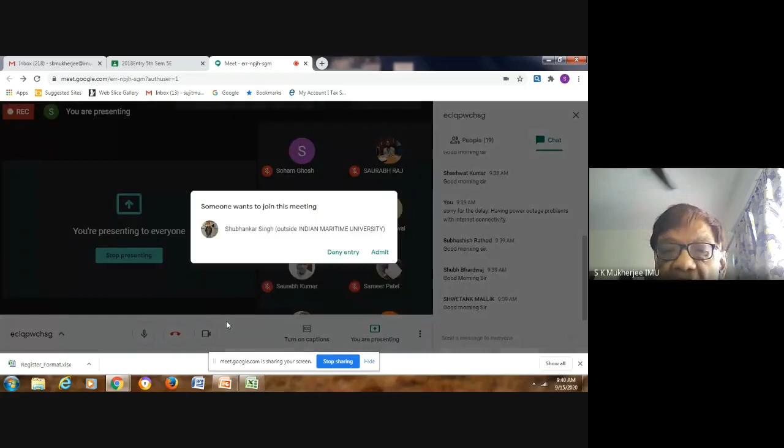There's Saurav Ranjan coming in. This time I think in the last class I had gone and put in too much information, and that information overload is probably going to...

Make it difficult for you to actually absorb the subject matter. So today's class, we will go into the subject, but with the objective of you actually absorbing the subject matter. I shouldn't simply be pouring out information without figuring out how you're going to absorb the subject. It is very important that you absorb the subject while it is being told, not while you're revising. Absorb it while you're being told in class, and keep a pencil and paper with you.

There are some small bits or nuggets of information I'll put across to you which are not there in the PowerPoint. Have those bits of information written down in a notebook, pad, paper or diary, because not all the information will be in the PowerPoint program. A lot of information that comes to my mind I will share with you, and that will enhance your knowledge and help you whenever you're asked oddball questions.

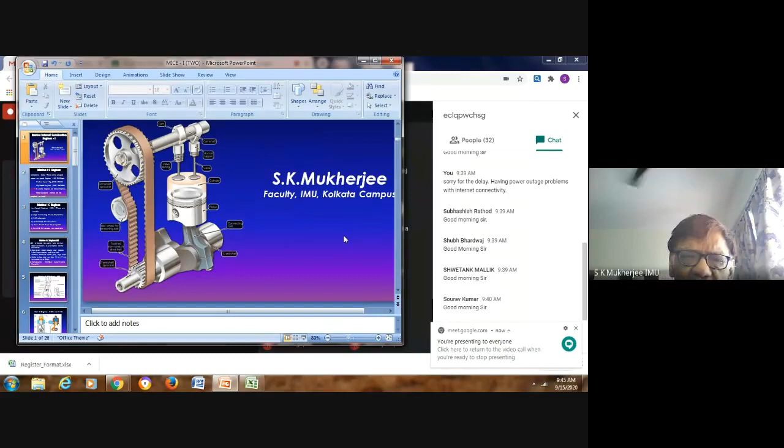Somebody's come. Come in. What sing is he? Shubhankar Singh. Okay, Shubhankar.

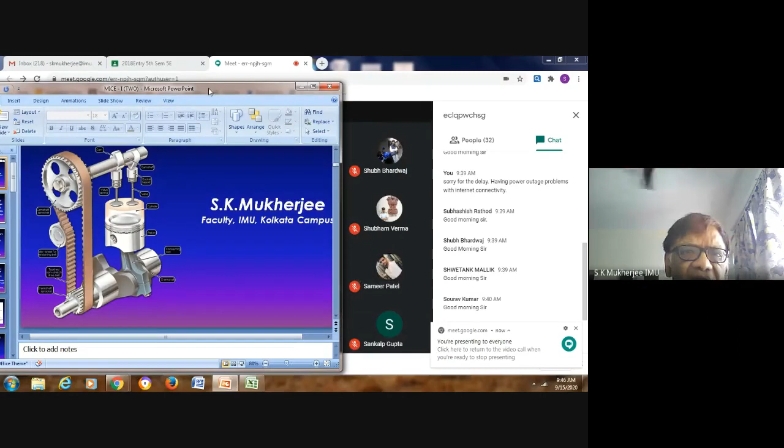Now let's start. In the last class, we had described two-stroke and four-stroke engine timing and the pressure and volume diagrams. A little revision on the four-stroke and two-stroke engines. We are going to continue now in detail, describing all the parts.

Now you see this first picture. It is a picture of an engine, not a marine engine, but a four-stroke engine. How do you decide it's a four-stroke engine from here? In the four-stroke engine there are four strokes, and in the two-stroke there are two strokes. In the two-stroke, two strokes make one complete revolution of the crank.

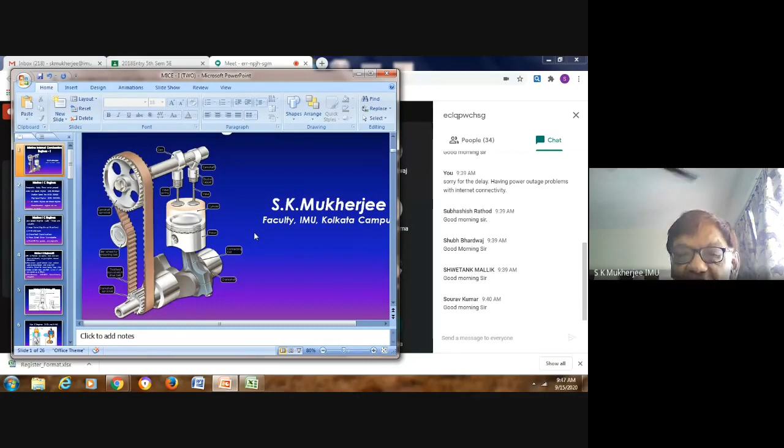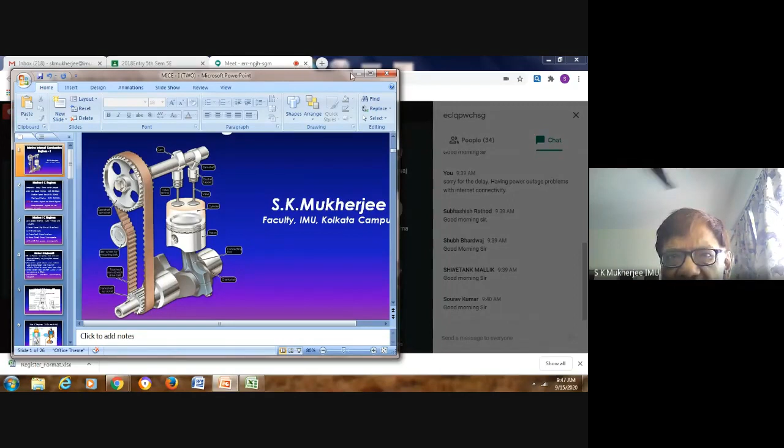In the four-stroke, the piston goes up and down, up and down. So that up-down stroke... every time it goes up and down, one revolution of the crankshaft has to take place.

So this is the crankshaft at the bottom of the diagram. It makes one revolution, and two strokes are completed. But in the four-stroke engine, you need four strokes to complete the cycle, so the crankshaft has to revolve twice. So every two times it revolves, the camshaft has to revolve once.

Why? Because the suction valve has to open only once in the cycle. Likewise, the exhaust valve also has to open once during the entire cycle. So during the entire cycle, the crankshaft rotates twice and the camshaft rotates once. One revolution of the camshaft means two revolutions of the crankshaft, because the piston has to go up and down four times, whereas the valve has to open only once during the whole cycle. That is why the camshaft speed is half the crankshaft speed in four-stroke engines.

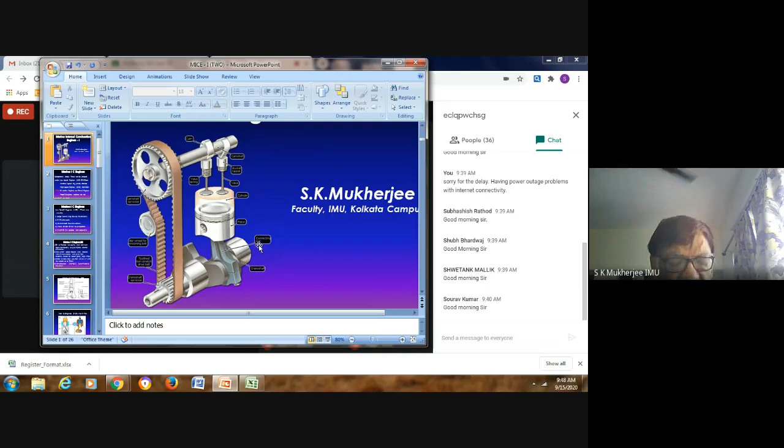All right, that's very clear. If you have any questions, do not hesitate to type out on the chat. Now who's come?

Sarsaki Bhadra. Sarsaki, you've come pretty late. Anyway...

So remember, the crankshaft speed is twice the speed of the camshaft. Over here we have a camshaft which is driven by a belt. This belt is not a metal belt, it is a V-belt medium, made of rubber with fiberglass reinforcement within the strips. And it has got teeth.

These are automobile belts used for automobile engines. Normally the camshaft in an ordinary engine is driven by gears - there will be idle gears here, and then it'll have a camshaft. Over here we have an overhead camshaft, OHC.

Overhead valves are operated - these are the two valves, one is the inlet valve, one is the outlet or exhaust valve. You see the cam over here - the cam peak is over here, and in this case the cam peak is down below. When the cam peak is down below, it means the valve is being pressed down to open. You can see the spring over here that has been compressed, whereas over here the spring has expanded because the cam peak is on top.

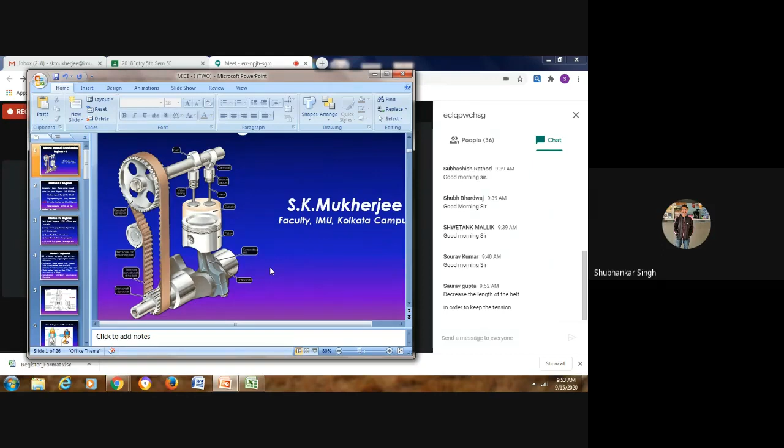I'm not saying to variably increase or decrease the belt, sir, from the initial stage. Okay, I get your point. The idea is to keep the position of the belt fixed. You cannot decrease or increase the length of the belt, but you keep pressure on the belt so that there is no loose motion or coming off of the belt.

And this wheel is kept under pressure by means of a spring. That spring tension will help to maintain a certain pressure, or spring compression, more than tension. This spring compression on the wheel will keep the belt tight so that there is no slippage, no looseness of the belt.

That's all. In marine engines, you will have a chain drive, and that chain drive will be identical to this. The chain by itself will be a loose chain, and it is loose so that it is easily slipped onto the sprocket wheels. After it is fitted on, there has to be some tension on the chain.

So that tension is also maintained by a similar wheel that you see here, and it will have a spring compressing on this idler wheel to keep that chain under a certain level of tightness. That tightness cannot be too much, it cannot be too little. And that chain, instead of driving gears like this, drives sprocket wheels.

I hope you understand what a sprocket wheel is. It is similar to what you see on bicycles - those wheels which have got teeth on them are called sprocket wheels, and the chain slips over them so there is no slippage. So that is what our marine engines use - either chain drive or gear wheels.

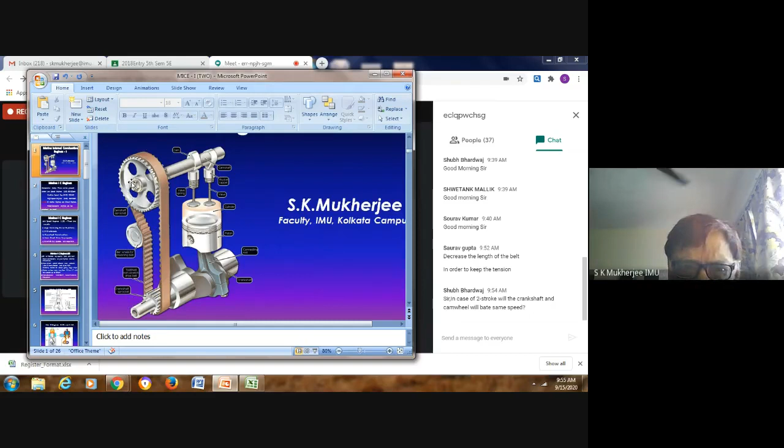There will be a number of gears. Actually, this particular camshaft is above the engine. Normally it is beside the engine, and there is one gear idler wheel which makes the camshaft run on the basis of the flywheel. Anyway, that is enough for this particular unit.

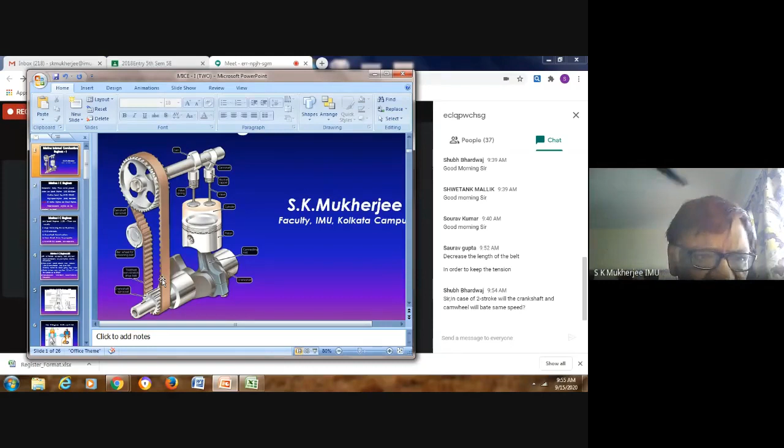Let's move on, let us study two-stroke engines in detail. Oops, too big. Okay.

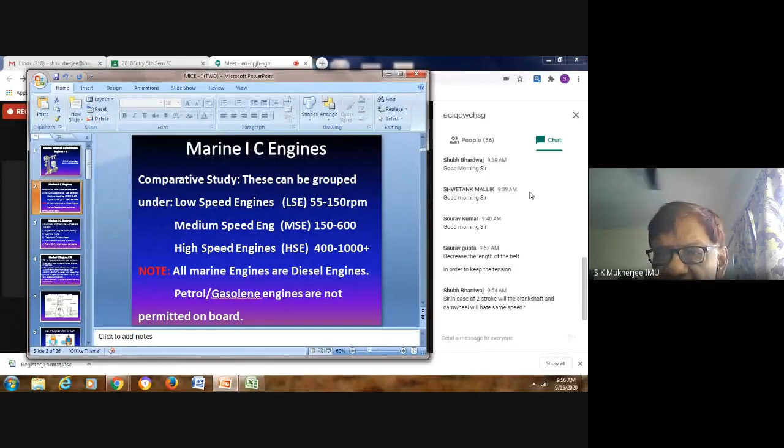I hope everybody has come - 36. And how many students are there in the class section here? 38, that means two boys are not present. Sir, they have their arrear paper today, sir. Oh okay, okay, so there will be no more disturbance. Let's make this the biggest screen I can make.

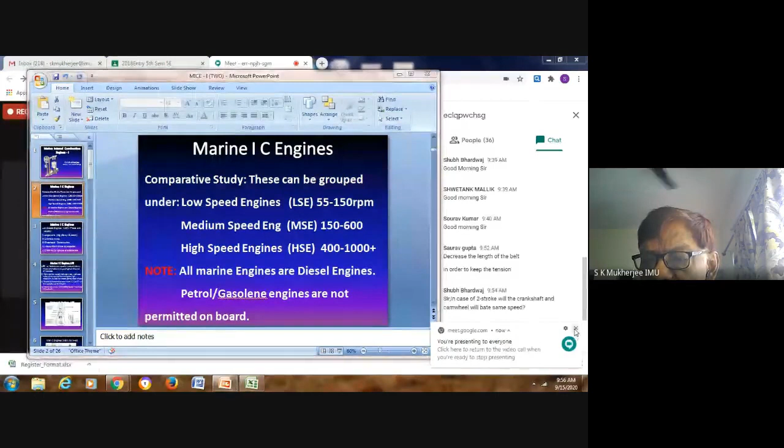Okay, now if you have any questions... a minute, somebody has asked, Bhardwaj has asked a question: Sir, in case of two-stroke, will the crankshaft and cam wheel speed be the same?

Good thinking, Bhardwaj. The camshaft and the crankshaft in the two-stroke engine will have the same speed because the piston moves one revolution for both the strokes, that means the upstroke and downstroke. It moves one revolution, and the camshaft will also operate only one time because it needs to operate the fuel pump only once during that one revolution. Correct? Good thinking, Bhardwaj. Two-stroke engines, camshaft speed and crankshaft speed is the same.

Four-stroke engine, crankshaft speed is twice the camshaft speed. Do not forget, especially at your basics, these are the questions you will ask: what is the relative speed of the crankshaft to the camshaft in the two-stroke engine? Is it the same in the four-stroke engine? If not, why? So be careful. Don't simply learn that it is twice the speed or same as the speed. You must be able to tell why it is the same speed and why in the four-stroke it is twice the speed of the camshaft. The question why has also to be answered, not just giving, yes sir, it is twice and this is same. That should not be enough.

All right, so let's go into comparative study of marine IC engines. Good, Bhardwaj, that you asked and got your concept cleared. Any other questions? Do not hesitate to write down, don't go away by keeping quiet.

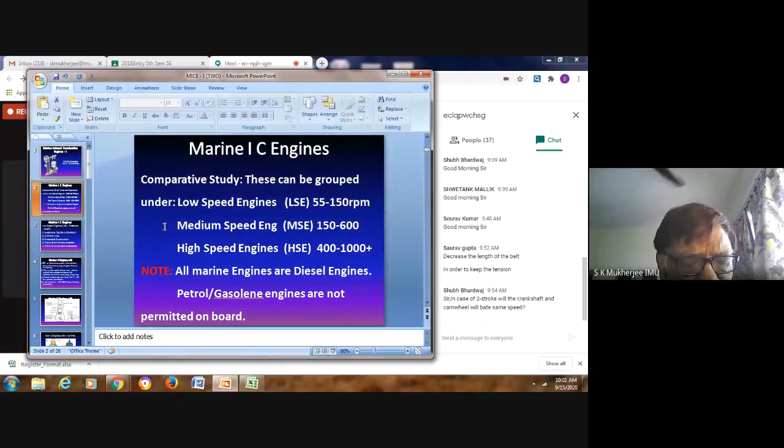Remember, do not make a mistake by ever saying that the lifeboat engine is a petrol engine, or that the emergency generator is a petrol or gasoline engine. You will fail in whatever exam you're appearing for, so do not make that mistake. Petrol is not permitted on board because it is a huge fire hazard.

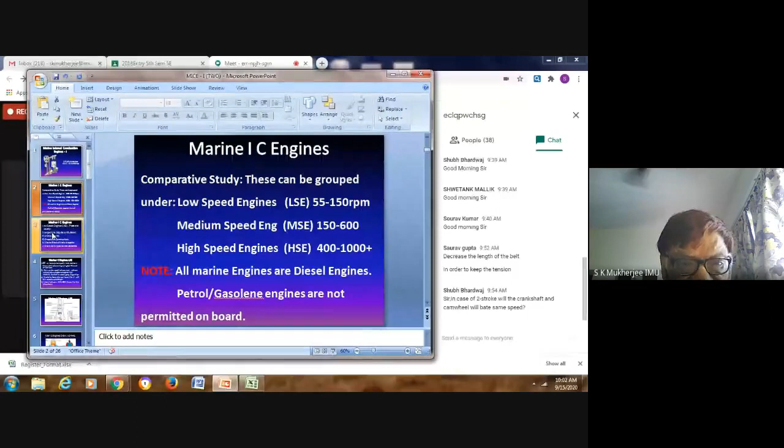Next, let's go on to low speed engines. These are usually large bore, meaning the diameter of the cylinder is large. They are anything above 80 centimeters, that's 800 millimeters, and the piston will also be proportionally large.

These low-speed engines are generally of the two-stroke cycle. I have not known any four-stroke engine being a slow-speed engine. There are no slow-speed engines amongst the four-stroke engines. So low-speed engines are of the two-stroke cycle.

Next one is the crosshead construction. Now this needs a little bit of clarification. What is a crosshead? It will take some time to explain, so pay full attention. I will show you some diagrams also which will help in understanding the crosshead construction of a diesel engine.

We have seen that the piston is attached to the connecting rod by means of a gudgeon pin or a wrist pin, so it moves angularly as the piston moves up and down. Now suppose you have a long stroke engine, a stroke that is very long. That means the diameter of the crank will also become large, because the bottom of that circle to the top of the circle is the stroke of the engine, the distance the piston moves in the cylinder liner.

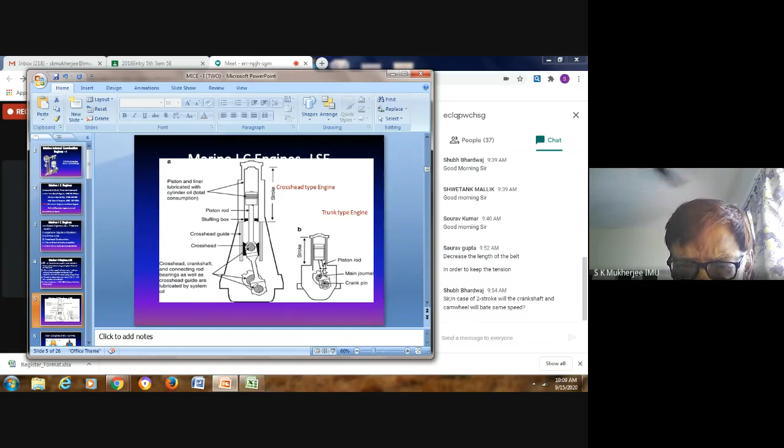Okay, so what is the crosshead? It is a means to connect the piston rod and the connecting rod, the crosshead. And this is required in long stroke engines. Why is it required? Because the long stroke will create a large angularity of the connecting rod, and this angularity will interfere with the bottom portion of the cylinder liner and may cause it to break or make contact, which is not feasible or permissible. So to avoid this, we are required to have a crosshead.

Remember, a two-stroke engine need not necessarily have a crosshead, but most students are brainwashed into believing a crosshead engine must be a two-stroke engine. No, that is not the way it is. A crosshead engine is an engine with a long stroke. A two-stroke engine may not have a crosshead. If the stroke is short, why have a crosshead? Doesn't make sense. It is additional equipment, additional attachment, additional maintenance, additional lubrication.

All are additional work. But two-stroke engines are still preferred in spite of this difficulty of a crosshead because they can burn very poor quality fuel. And fuel cost for a ship owner is 60% of the cost of running the ship. So it makes sense to burn poor quality fuel. And to burn poor quality fuel, you need more time for the fuel to burn. That is why slow speed engines with a long stroke allow for the fuel to burn continuously and completely by the end of the stroke.

All right, let's get back. So that is what is crosshead construction. We will go in detail regarding the crosshead at a later date. I will go to all the parts and describe them in detail. Right now, we are describing low speed engines in general. Okay, so they have a large bore, they run on two-stroke cycles, they have crosshead construction. Usually, because they are low speed engines, they will have a crosshead.

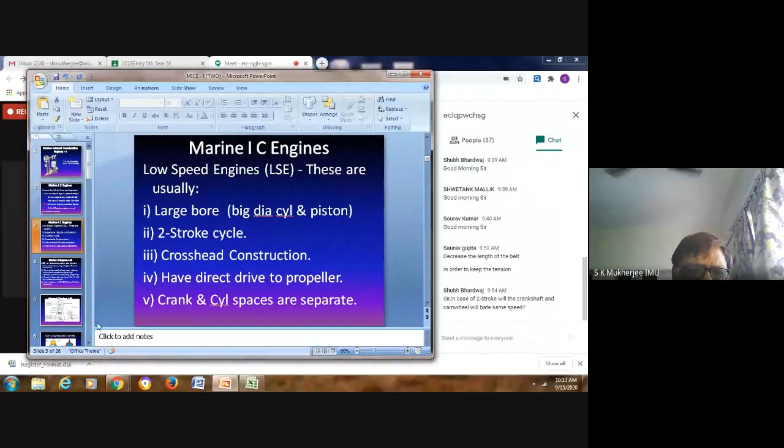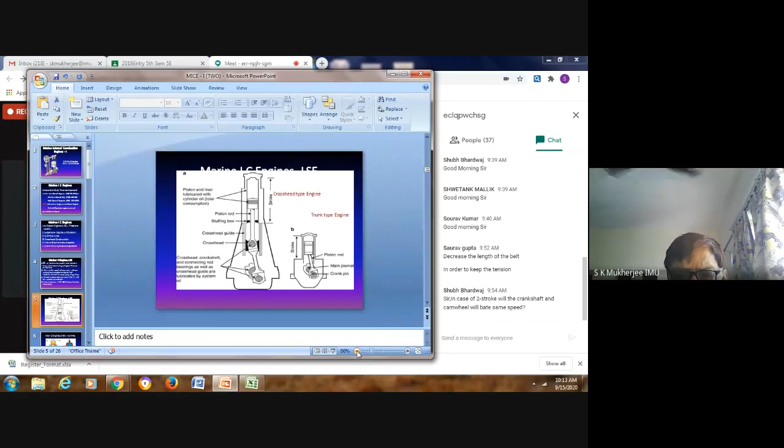Here is your two-stroke engine. The plate is here, and this is the piston rod. Let me make it a little bigger.

Because if you have a chat question, then I won't be able to see it - I want to check if there's any question.

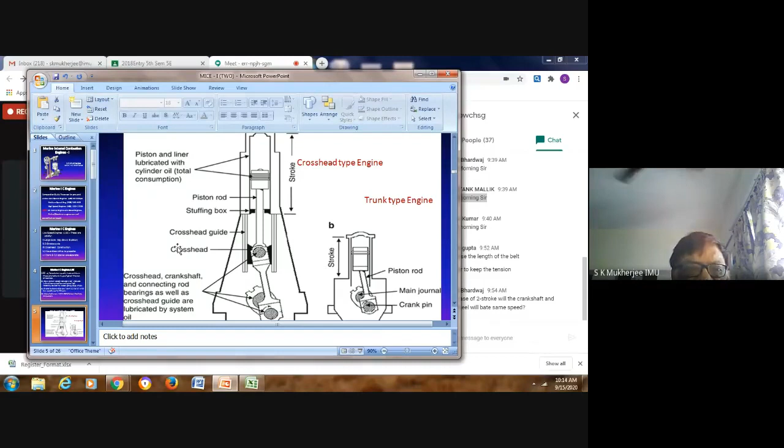Now let's have a look at the diagram. I hope the diagram is quite clear now.

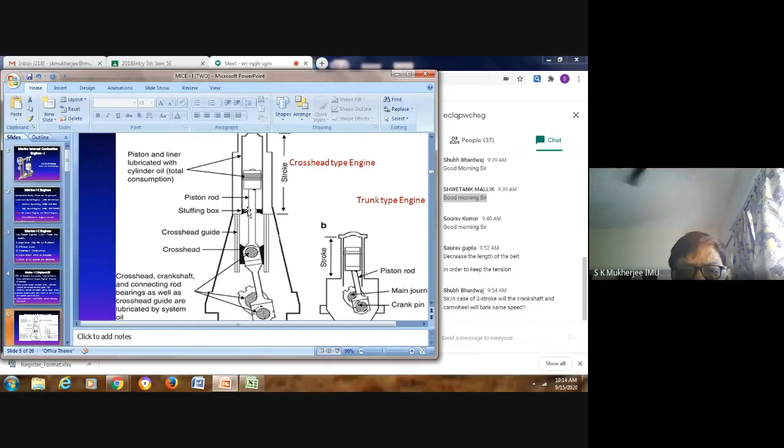Now, this is the horizontal plate I was talking about, and on this plate you have a hole through which the piston rod passes. But you need to provide a sealing arrangement on that piston rod, because this under piston space that you see is used as an air pump - it is called under piston scavenge spaces.

Air coming to the engine arrives in stages. The first stage is the turbocharger, which draws air from the atmosphere, compresses it, and sends it into the air pipe. From there, air is fed to individual units of the engine. In some engines there are two stages. Air comes into the air manifold at a temperature of about 130 degrees centigrade, because compressing air raises its temperature, so this air has to be cooled. After cooling, it's passed on to a certain section of the air manifold.

From here, there are non-return valves that allow air to flow in only one direction, into the under piston spaces. Once it enters that space, when the piston comes down it acts like a pump, compressing the air under the piston. That pressurized air then goes through another set of non-return valves into another chamber of the air manifold, and from there directly to the inlet ports. So there are two stages of compression.

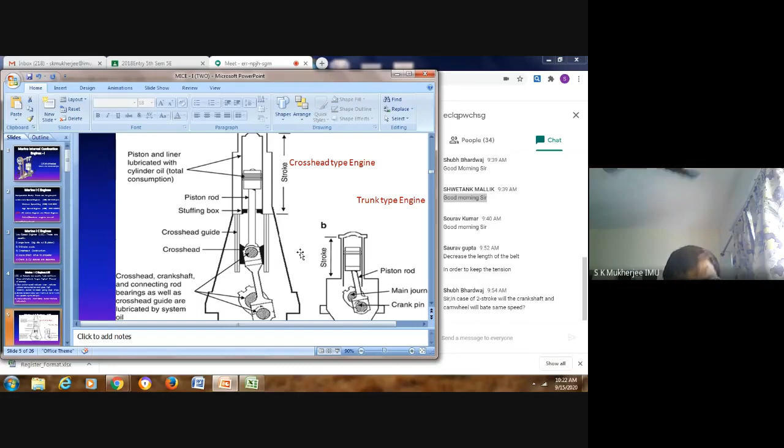What I needed you to understand is this concept, where the crankcase space and the under piston spaces are separated by means of a diaphragm. I have a better diagram and I'm going to show that to you. Keep your cell phones ready and take a snapshot immediately, then from that snapshot, hand draw and practice that diagram. That is the diagram you will be required to draw in an exam - not this one, nor the fancy pictures I've shown you. I will give you a diagram which you can actually draw easily, and that diagram has the names of all the parts, which will help you improve on naming parts of the engine. Okay, let's get back to our subject.

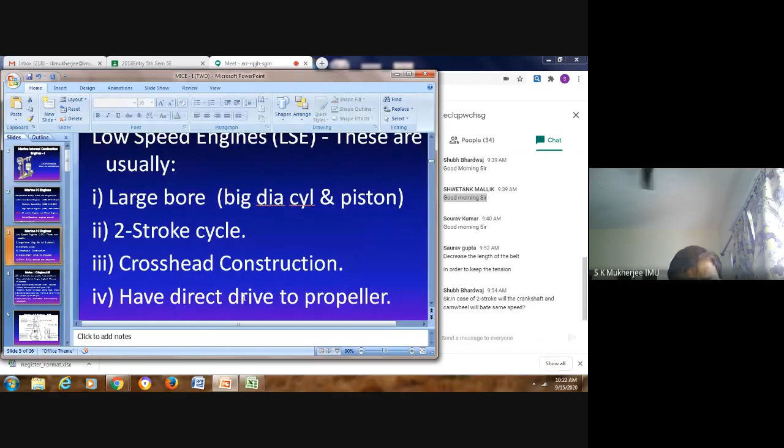Yeah, sorry, we were on this one - have direct drive to propeller. There's one more, I think - crankcase and cylinder spaces are separate. I hope now you understand that crankcase and cylinder under piston spaces are not the same. This is the cylinder, so these spaces are separate from the crankcase spaces by means of a diaphragm, and within the diaphragm you have a sealing arrangement called a stuffing box. It is also called piston rod gland.

So don't forget, you can write these small notes - stuffing box is not the only name for it, it can be called piston rod gland, and it consists of several rings. It's quite a complicated setup, and it helps in sealing the under piston spaces and the crankcase spaces, and any oil that is scraped on the piston rod is drained out. There's a drain for the oil which allows the under piston spaces oil to be drained out of the engine, because cylinder oil, once used, cannot be reused. But crankcase oil is continuously being reused. You have a separate arrangement to continuously clean this oil, called a centrifugal purifier, but that will come later.

Remember, this system oil in the engine is similar to your blood system. Absolutely similar to your blood system. Any problem with the engine, you can identify by taking a sample of the lube oil, sending it to the laboratory, and understanding.

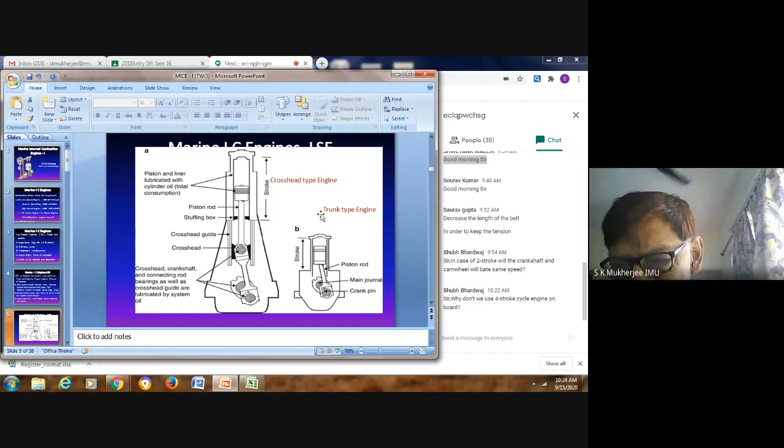Bhardwaj, of course we use 4-stroke cycle engine on board. Not all engines on board are 2-stroke cycle. The auxiliary engines, where fuel cost is not the biggest problem, they are all four-stroke engines. The emergency generator is also a four-stroke engine. The lifeboat engine is also a four-stroke engine. And in some cases you have an emergency compressor, which is run by an engine, and that engine is also four-stroke cycle.

Don't believe otherwise, because when I describe two-stroke, it is the main propulsion engine only, for running the propeller. Two-stroke engine is not used for any other purpose. So the main engine, very common for most ship owners, is a two-stroke engine because it can burn very low quality fuel. Four-stroke engines generally could not earlier. Now they have been modified and they can burn it, but they have certain restrictions, and because of those restrictions they are put aside, so owners still prefer two-stroke engines. That's not to say four-stroke engines aren't used for propulsion - they are, but you will need possibly two engines or a V engine to give that additional power.

All right, so where was I? So you now understand crank and cylinder spaces are separate. Okay.

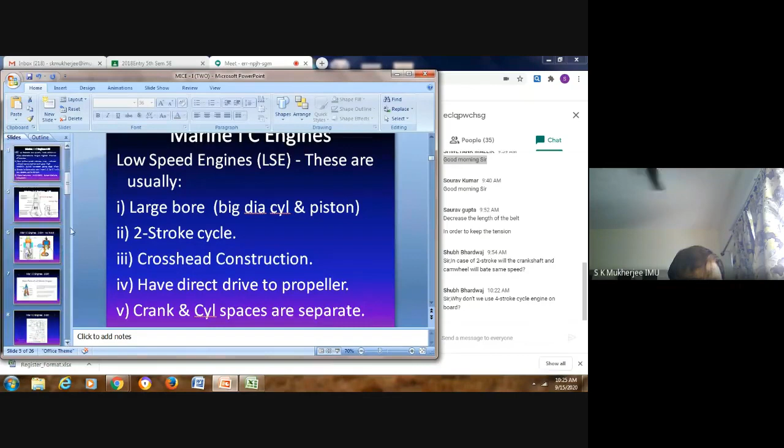This is where your crank and cylinder spaces are separate, but in the non-crosshead type, these are called trunk type of engine. Why is it called trunk type of engine? So where is the excess oil scraped off the cylinder used?

I told you just now, any oil that is scraped off from the cylinder liner and falls on the diaphragm has to be rejected. There are drain pipes from there leading out of the engine and they go into a sludge tank. That oil is gummy, sticky, full of carbon, and okay, it has been neutralized, no doubt, but that oil cannot be used again. It is a one-time use. Cylinder oil is a very costly oil and it is a one-time use oil. You cannot reuse that oil.

But the crankcase oil, what is inside here, is used continuously and almost never changed. Even if it gets dirty, it is passed through a purifier for continuous cleaning and put back in the crankcase. It is similar to your kidneys. This is your blood system, what you see inside the engine, the oil that is used, and it has kidneys - those kidneys are called centrifugal purifiers. They purify the oil and put it back in the engine, much like your kidneys.

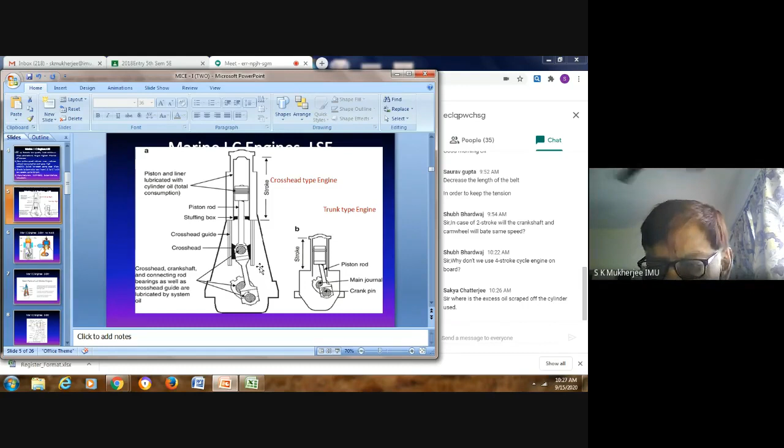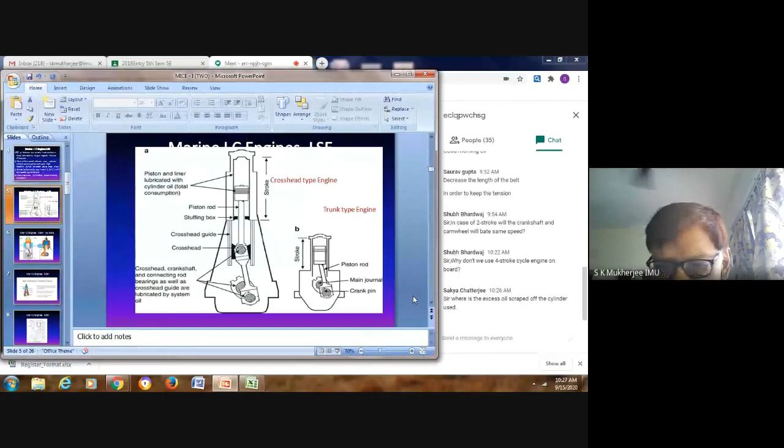But that we'll go to later, we are going off the topic at the moment, and Chatterjee, you're leading me off topic. But anyway, do ask questions. The excess oil scraped off the cylinder is not used again, ever. It has to be rejected. It is like sludge, okay.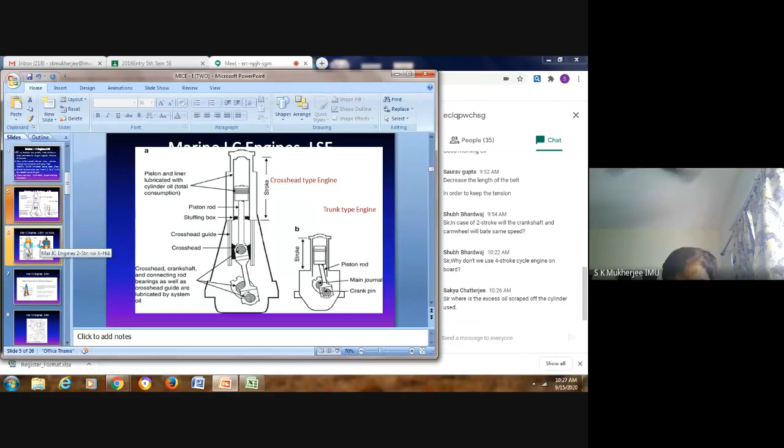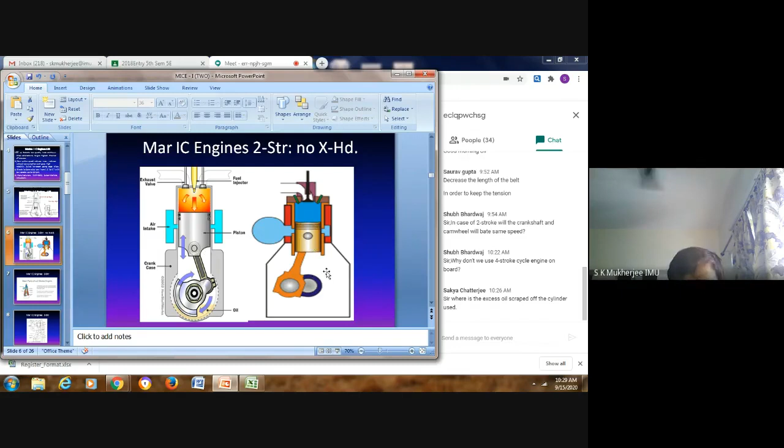These two diagrams are indicative of two-stroke engines without the crosshead. These are the main parts of a two-stroke engine. You can read this; I think the diagram is quite clear.

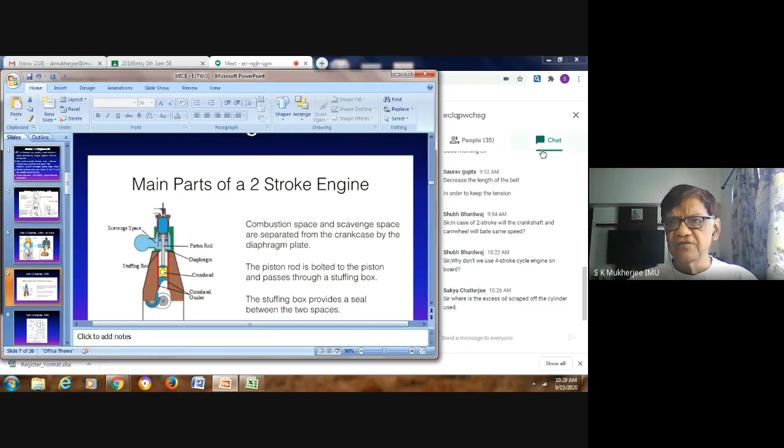Okay, I hope you can see me. I'm also, yeah, you can see me. So that is your diagram.

Any more questions? Good, you asked this question because a lot of boys don't know about this cylinder oil being thrown out once it is used. They think it can be used again, purified and put back. No, it cannot be used. It is rejected.

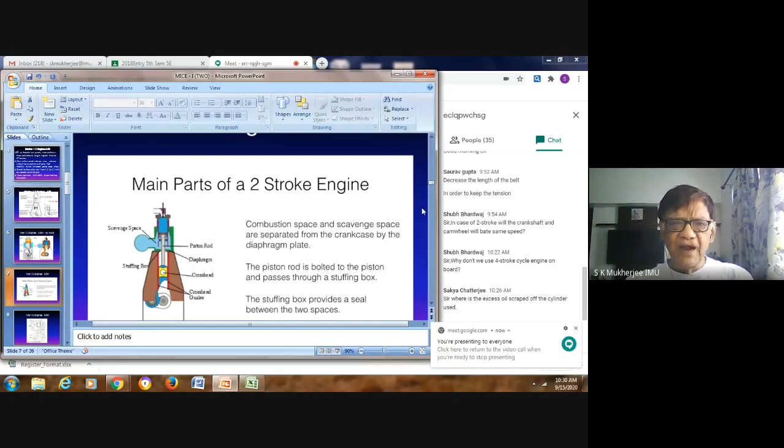Now, main parts of a two-stroke engine. The combustion space and scavenge space are separated from the crankcase by the diaphragm plate. This is the diaphragm plate, the same diagram I showed you earlier where the stuffing box is.

That stuffing box is a sealing arrangement on the piston rod. Remember, the piston rod surface is mirror finish. It's very smooth and shining like chromium. It is polished and polished and polished.

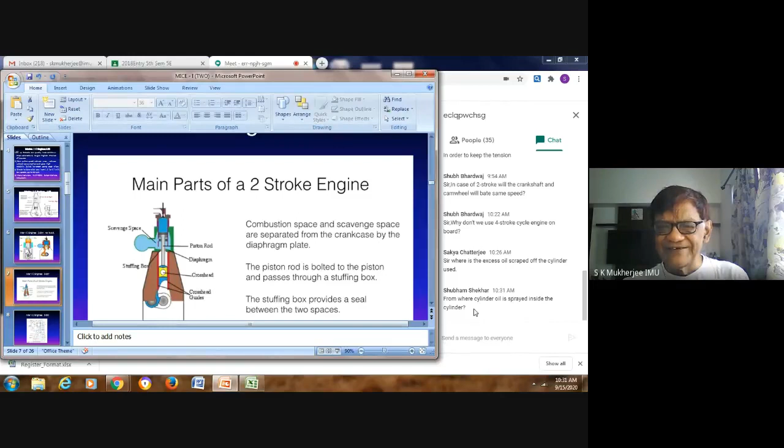Where is it scraped? It is scraped into the sludge tank. There is a separate tank where the sludge oil goes, from where cylinder oil is sprayed inside the cylinder. You're going into depth. Let's go back - from where it is delivered into the cylinder liner.

Let's make it a little interesting. Of course, now two-stroke motorbikes are no longer in fashion - all motorcycle bikes are four-stroke. But I remember when two-stroke motorcycles were common, though you boys won't remember since you haven't ridden them. The principle of lubrication is the same.

These two-stroke motorcycles had a fuel tank, and in this fuel tank we used to add a little mobile, that is the lube oil, and then fill the petrol. So the petrol and that lubricating oil used to mix. So the petrol in the two-stroke motorbike was a mixture of lubricating oil and petrol. In the four-stroke bike, you only fill petrol - you don't fill lube oil in the petrol tank. You have lube oil in the crankcase of the four-stroke engine. In the two-stroke engine, you do have crankcase oil, but you also have the fuel tank filled with lube oil.

Now this is a major issue, pay 100% attention. When you're riding the two-stroke motorcycle, the piston needs lubrication, and that lubrication comes from within the petrol because lube oil was mixed with it. Since the piston is working inside, it gets its lubricating oil because the petrol burns out, but the lube oil does not burn out. The lube oil partially burns out and partially remains on the surface walls. This provides for the lubrication of the piston and the ring for the two-stroke motorcycle engine.

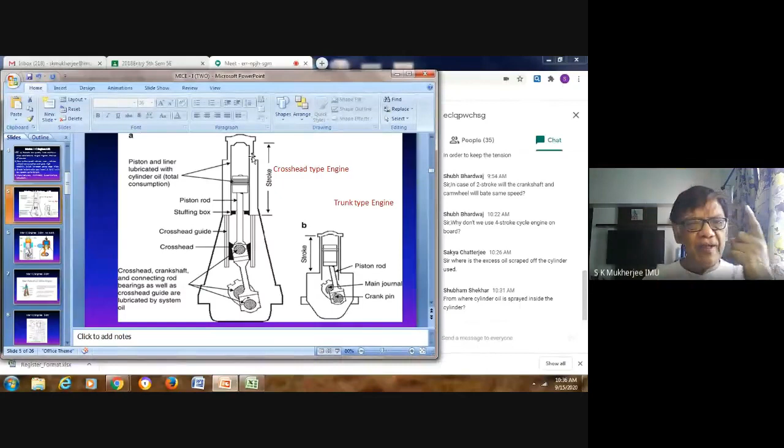Now, this lubricator is run by a mechanical linkage, and the central crankshaft of that lubricator is about 10 inches by 4 inches by 6 inches. Small lubricators, there may be 2 or 3 of them. Each lubricator will deliver oil to maybe 1 or 2 units, with multiple pipes coming out, the diameter of a pencil. These pipes go onto the cylinder liner, say there are 6 pipes, 60 degrees from each other, each having entry into the combustion chamber.

When the engine runs, the mechanical linkages run the lubricator, which is filled with oil. This lubricator is actually a miniature pump, multiple miniature pumps, so there'll be 6 pumps in each, and each of these delivers oil to the cylinder liner. So each time the piston goes up and down, oil is delivered directly into the cylinder liner for lubrication. Usually a little excess is given because nobody wants under lubrication, preferably slight over lubrication for safety.

But remember, over lubrication is as bad as under lubrication. Too much oil is as bad as too little oil. So chief engineers, to stay safe, make marginally more. So that oil ultimately finds its way falling along the cylinder liner walls and onto this diaphragm, and as it comes onto this diaphragm, it starts filling up this place.

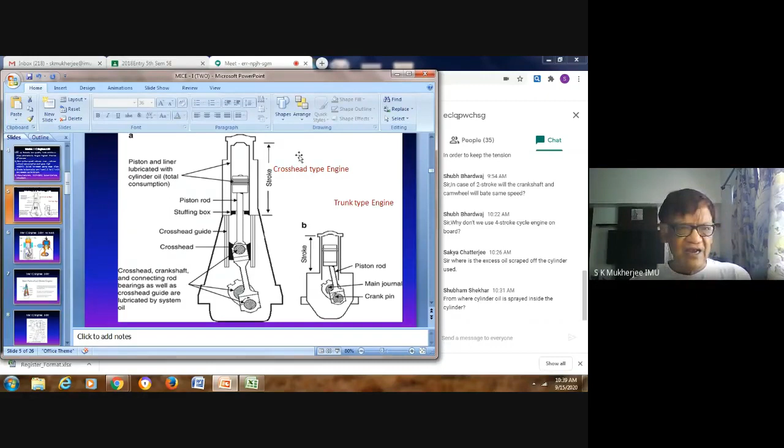Up to that, we will say enough for now. From where is the oil sprayed inside the cylinder? So you have separate oil pipes which are fed into the liner for delivery of cylinder oil. All right, Shubham Shekhar, that is our question addressed. Any more questions? Put it up on the chat.

So combustion space and scavenge space: scavenge space is what you see in blue, and combustion space is up over here. They are not separated. What he has said here is not right, combustion space is not separated. It should have been crankcase spaces, he has made a mistake.

I've copied this full thing. Now I don't know how to change this. He should have said under piston space and scavenge space. It should have been: under piston space and scavenge space are separated from the crankcase by the diaphragm plate. It doesn't make sense.

What he has said here, just remember, under piston space and scavenge space are separated by a diaphragm. The combustion space is the combustion space, it is integral, it does not have anything separate from it. It is integral and there is no separation from anywhere. What is separated is the scavenge space and the crankcase space. The combustion space is inside the cylinder liner, it cannot be separated by anything. It is an enclosed space formed by the cylinder liner, the piston, and the cylinder head on top, so that cannot be separated.

This statement over here needs a little correction. This has been copied from the internet, so I should try... I don't know how to remove it.

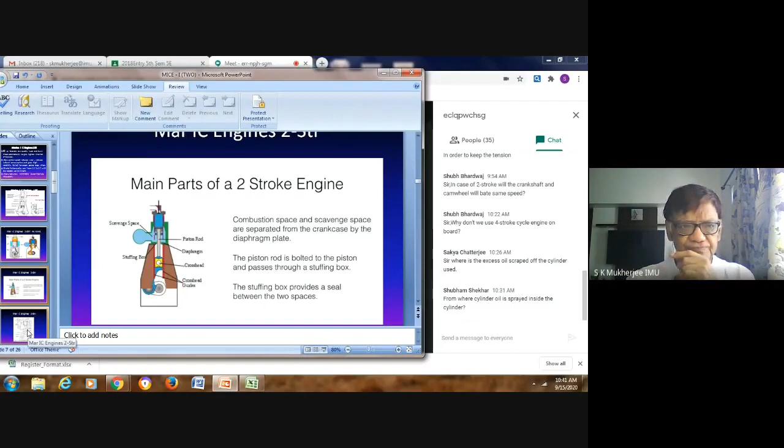Now get your cell phone ready and take a snapshot of the next picture that I'm going to show you. This is the diagram I wanted to show you, and you need to take a snapshot with your mobile.

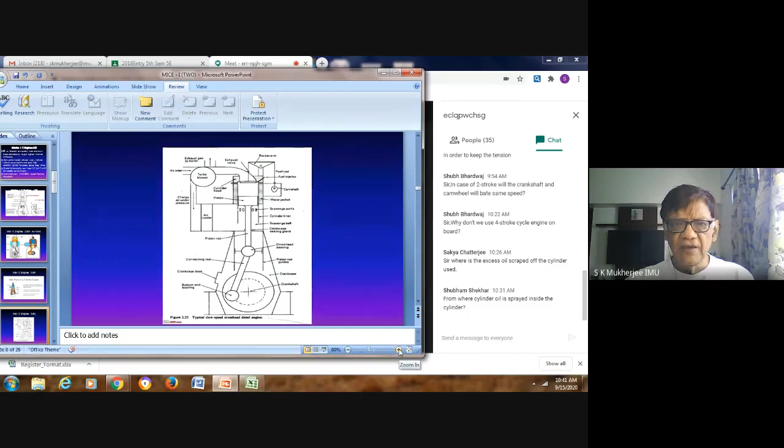Now this is a line diagram which you can actually draw. This is not a diagram which is difficult to draw, but you need to practice and you need to know the names of the parts. All the names of the parts are given over here, and it's quite simple to understand. Now let me try and explain this to you.

The air is coming in from here. It comes into what is called a turbo blower, which is part of a turbocharger. The turbocharger consists of a shaft and two fans. Consider them as fans, one fan this side, another fan this side. Now, when you blow air on one fan, obviously it is going to rotate.

Exhaust gases are led onto one fan and it rotates that fan. Because the fan rotates, the shaft will also rotate. The entire assembly of the two fans and one shaft is called a rotor, R-O-T-O-R. This rotor will rotate if exhaust gases are forced onto the fan blades, and since the fan rotates, the whole rotor will rotate.

On the other side, the other fan and casing are made in such a way, the blade angles are made in such a way, that it will draw air from the atmosphere and pump that air into the air manifold. So the exhaust gases coming out from this exhaust trunking will rotate the rotor, and the turbo blower side will blow air and pump that air into the air manifold or scavenge manifold.

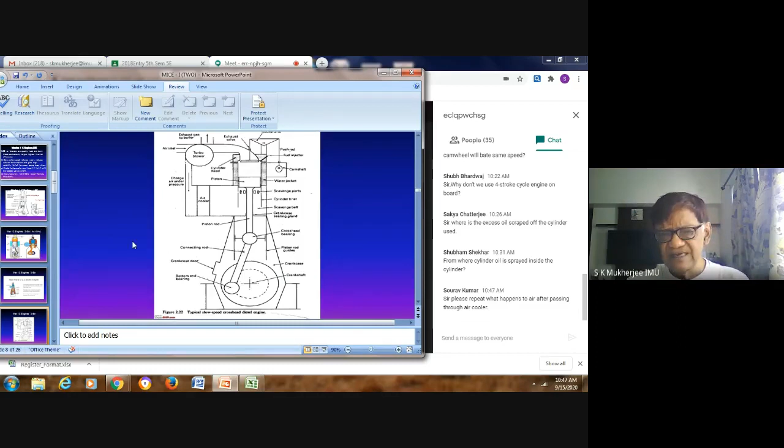Any questions in understanding this diagram or any part of the lesson that I have already explained to you? Do not hesitate to ask questions. Okay, let's move on.

Excuse me, sir. What is it? Sir, what happens to the air after it passes through the air cooler, sir? Please repeat it again, sir.

Oh, okay. Over here, he has shown a very simple diagram. He has shown that after it passes through the air cooler, it goes into this scavenging manifold over here. So when the piston comes down, it goes through the ports and charges the cylinder.

But in the more modern engines, the underside of the piston is used as a pump. So the air that comes in here first actually goes under the piston, and it comes into the underside of the piston by means of some non-return valves. They are not shown over here. Those non-return valves allow the air to pass only to the underside of the piston.

And then there is another set of valves above those non-return valves which allow the air to come on this side, and they are separate chambers over here. These separate chambers allow for differential pressure. So once the air is compressed by the piston when it's moving down, it compresses the air and sends it to another part of the manifold, where it can go directly into the ports and fill up the cylinder.

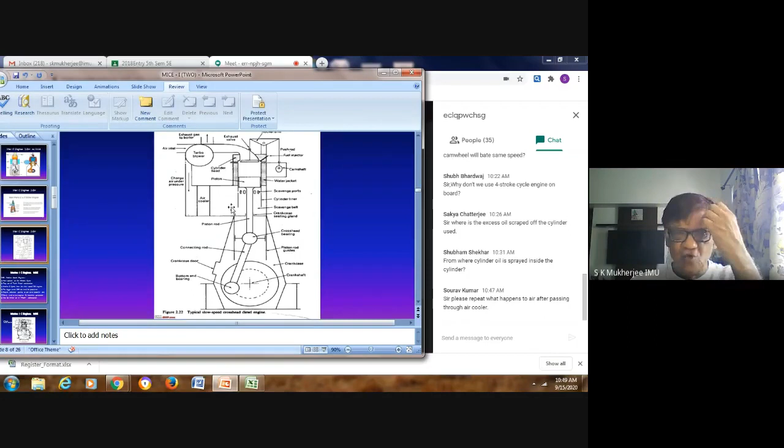So there are actually two stages of compression over here, but right now, for the sake of simplicity, they have shown only one stage. In the more modern engines, there are two stages. But for your fifth semester, keep it to a single stage. Be aware that there is a second stage, and the under piston spaces is used as a pump, so you get better efficiency of the engine. You don't waste anything. So that is what the air is doing.

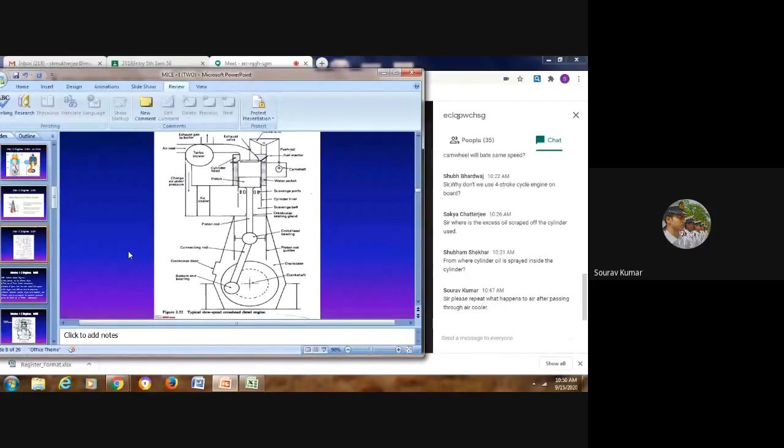It goes into the cylinder as fresh charge air. Is that clear? Have you understood? Yes, sir. Okay. If you have any more questions, I will explain more. But for your fifth semester, this single stage charging is adequate.

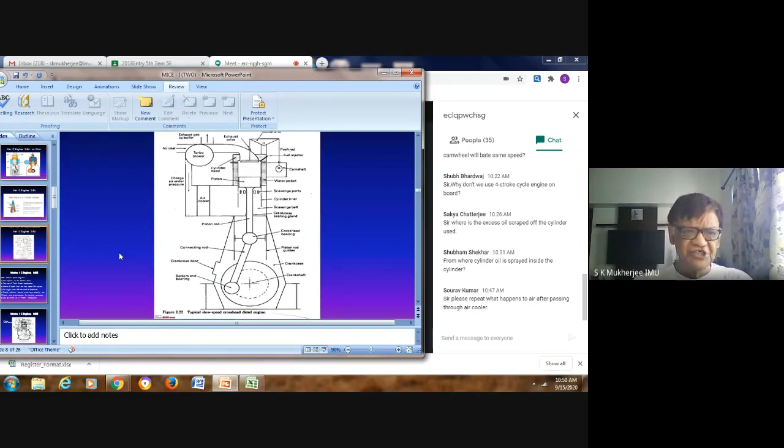In your sixth semester, you will go into a little more complicated areas of engine function. For right now, I hope you have taken a snapshot of this. You can practice this diagram at leisure. Next, we are going into medium speed engines.

Okay, so medium speed engines mostly operate on the four-stroke cycle. Let me put down this as a note: on the four-stroke cycle, and they are of the trunk piston construction. What is trunk piston construction? Now we come to a position where you will have to think a little more, and this is because we are going to consider all the forces that are acting on that piston. Most operate on the four-stroke cycle, that everybody understands. They are of the trunk piston construction.

Now this is a trunk piston construction. What does trunk piston construction mean? The word trunk is sometimes used for your own body - the trunk of the body is the mid position: your waist, stomach, and lower chest part. Similarly, for the piston, the portion below the piston ring is sometimes called the skirt, sometimes called the trunk. Why is it called trunk in this case? Let's have a look.

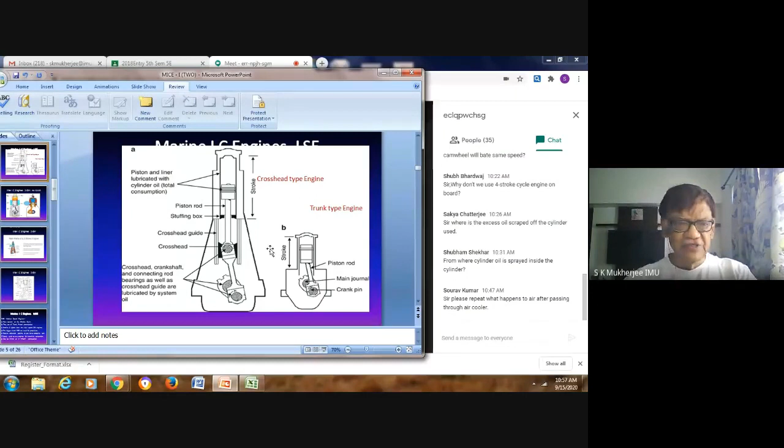They are of trunk piston construction. Four-stroke engines are of the trunk piston construction. Also, two-stroke engines can be trunk piston engines where the stroke is small.

These medium speed engines are smaller and lighter than the slow speed engines. Obviously, the components are smaller and lighter. The bigger size medium speed engines are used for propulsion.

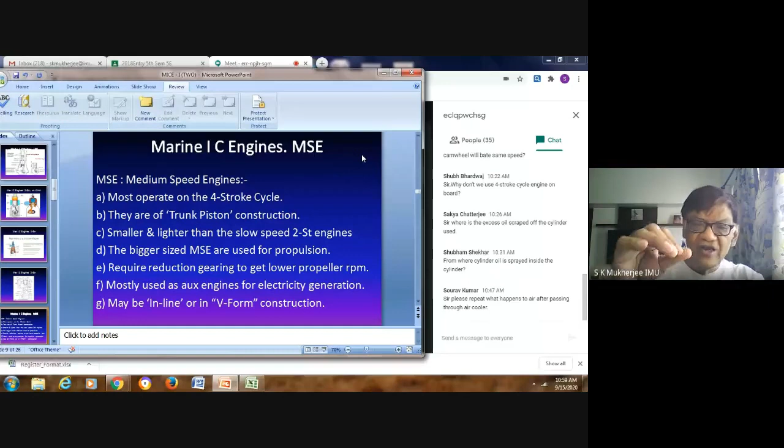When we were at your stage, we were told medium speed four-stroke engines cannot run on heavy oil or residual fuel, also called heavy oil. They can only burn light distillate fuel, meaning fuels which have been distilled, very clean and very good quality, that don't dirty anything. But soon in 1973, just after we joined ship, the oil prices suddenly went up, and at that time all our medium speed engines were burning distillate fuels. The price of oil shot up, making it very costly to run our generators, which are four-stroke engines, on light diesel oil or distillate fuel. So the quality of fuel the company bought for those generators kept getting lower and lower, and we started having problems on the ship: incomplete combustion, carbon deposits, smoke from the funnel, and less power from the engine because of the fuel quality.

That is why research went into making four-stroke engines run on heavy oil as well. Today, there are four-stroke medium-speed engines running on heavy oil, but they need added gear to prepare that oil before injection. After injection, the oil has to burn completely, and if the engine speed is too high, the oil cannot burn fully, so you end up discharging black smoke. To avoid this, they made a restriction on medium speed engines burning heavy oil: the RPM, which determines the piston speed and the time available for the fuel to burn. That speed is restricted to 750 RPM, the maximum speed at which a medium speed four-stroke engine can burn heavy oil.

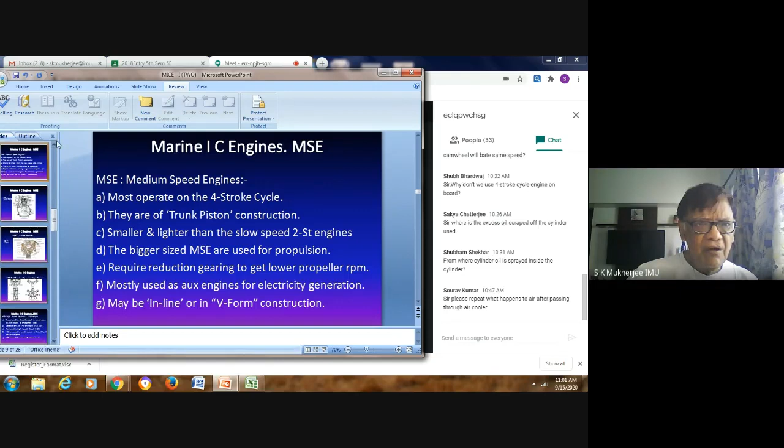I think you have missed some plate. Oh, we have missed this plate. I'm sorry, I overshot. Actually, what happens is when I start talking on a subject, I go deeper into it. We have not finished the low speed engines, that is why I was surprised. We have not come into this area.

Okay, let's go a little bit back. Slow speed engine, this we have done, suited for ocean going, stroke to bore ratio. The stroke to bore ratio determines the size of the engine and the implications involved. When I say stroke to bore ratio is 1.2, it means the stroke is 1.2 meters and the bore is 1 meter. If I say stroke to bore ratio is 3.2, the stroke is 3.2 meters and the bore is 1 meter. If the stroke is 4.7, it means the stroke is 4.7 and the bore is still 1 meter. So 1.2, and even 1, is also a stroke to bore ratio, and those engines where the stroke and bore are the same are called square engines, so 1:1.

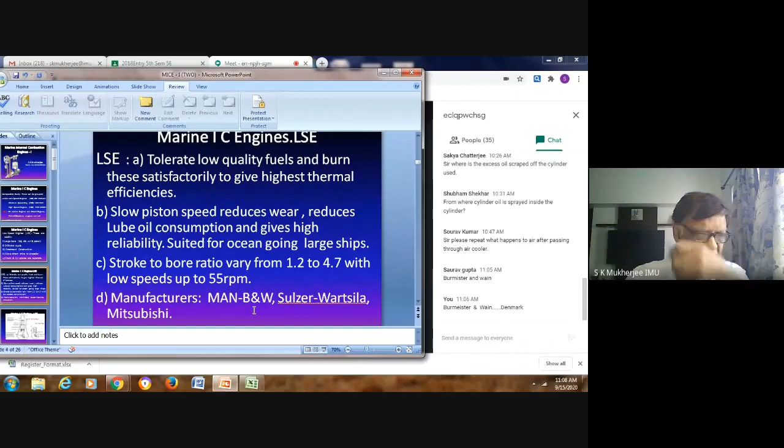There were other companies like Gotaverken and Harland and Wolff, but they have finished—they are no longer of any consequence. They used to compete with MAN, B&W, Sulzer and Wärtsilä during their heyday when those were operating alone. Now that they have formed corporations, they have become much stronger, combining advantages of both to gain advantages in totality, making them very strong and advantageous.

I would like you, as an assignment, to prepare on an engine which Wärtsilä makes, called the W64. We have already started on our medium speed engine—this is the largest medium speed engine in the world, with a piston diameter of 640 millimeters. Normally anything larger than this has to be a two-stroke, but this engine gives power equal to some two-stroke engines and is used for marine propulsion. So do read up on the W64 Wärtsilä engine, spelled W-A-R-Tsilä.

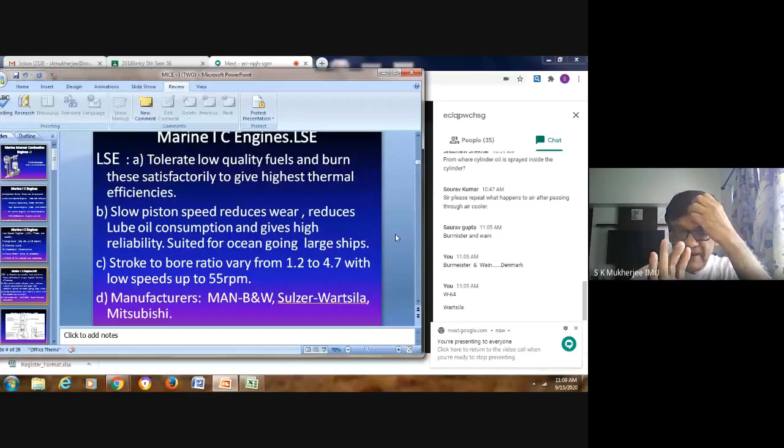So I'm going to keep my information up to this level. I think I've given you enough information to digest, ingest, swallow, and absorb, and be able to recall. One, I want the 5 temperatures - flash point, fire point, ignition point, pour point, and cloud point - well understood. Next class, ask me to clarify, and I will clarify well, but under no circumstances can you afford to make a mistake in defining these 5 temperatures.

Number 2, I would like you to make a sketch on your own and practice that diagram which I gave you - a simple line diagram of the main engine, 2-stroke. If ever you are asked a question to sketch and describe a 2-stroke engine, that is the diagram you will fit, not the colorful pictures I have put up for making you understand. It is not possible for you to draw those colorful pictures, but it is possible for you to make those line diagrams.

Third, I want you to explore and find out about the W64 Wärtsilä engine. It is the most powerful medium speed engine as of today. All right, that will be all for today. Now, if you have any questions, let me know, because I will keep it at this for today. There's enough information doled out to you. In the next class, we will do medium speed engines, V-type engines, their advantages, disadvantages, etc. Any questions?

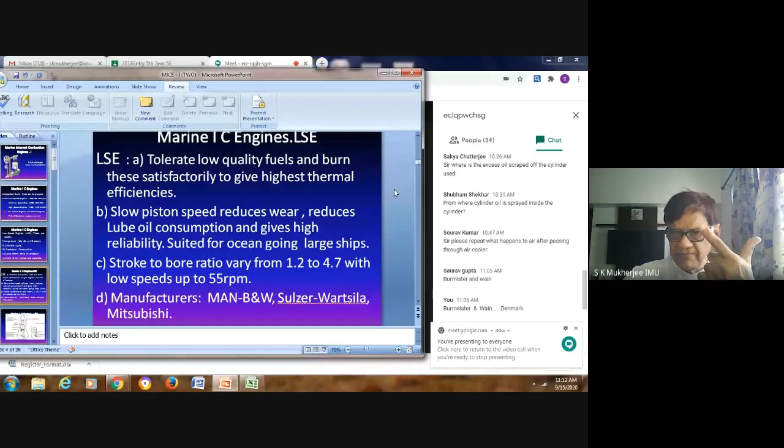Remember the names of the engines: MAN, B&W, Sulzer, Wärtsilä, Mitsubishi. If you're asked who are the manufacturers of 2-stroke engines in today's marine world, you should be able to rattle off 5 names. In fact, all the small part A questions in your exam will come like this - name 5 two-stroke marine engine manufacturers. I will put a question like this, and you should be able to rattle off what stands for MAN, what stands for B and W.

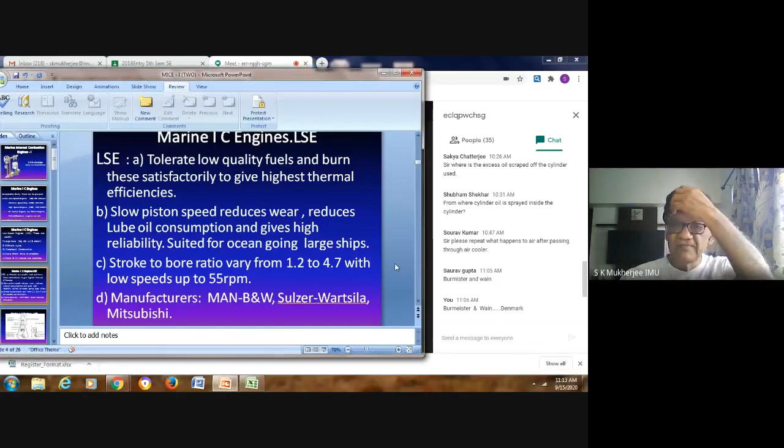All right, it is not BMW. Remember, okay, that is also a question - what stands for BMW? Everybody has seen BMW cars on the road and you admire them. Ah, that is a BMW. But what does BM stand for? Oh, sorry. Sorry, BMW.

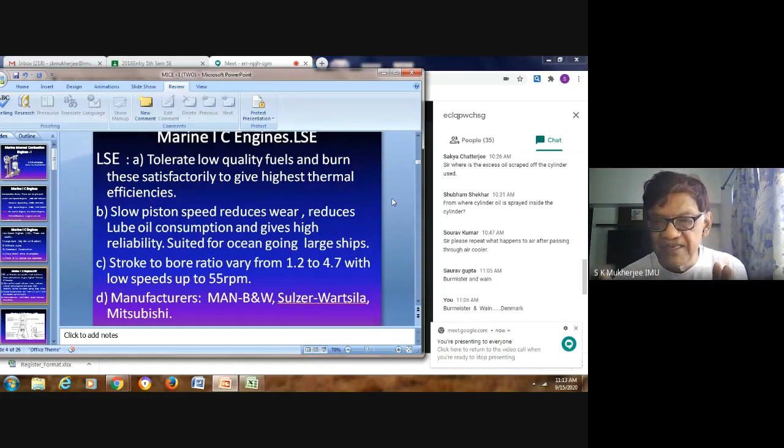No, Saurav Gupta, it is not Burmeister and Wain. That BMW, Burmeister and Wain, is for marine diesel engines. The car BMW is something else - what is it? That car manufacturer, it's Bavarian Motor Works. Yes, Bavarian Motoren Werk, W-E-R-K. I'll give you the spelling.

B-A-V-A-R, Motoren. Okay, Bavarian Motor and Werk. This is how... why it's not coming? Oh yeah, sorry, I was... yes, yes, you're right, Saurav Gupta, you're right. Bavarian Motoren Werk, Motoren Werk - see the spelling of Werk, it's a little different. This is the real spelling.

Anyway, we'll call it off for today. I hope I've tried to make it as interesting as possible so you don't fall asleep in front of your laptop. Sometimes speaking in front of the laptop, I start feeling sleepy, and you might have observed me trying to yawn. But that's the way we have to get along in today's world. This corona has given us a lot of problems, but we have to overcome this problem. It is our will, our determination, that we'll go through the subject, learn it, and be competitive enough.